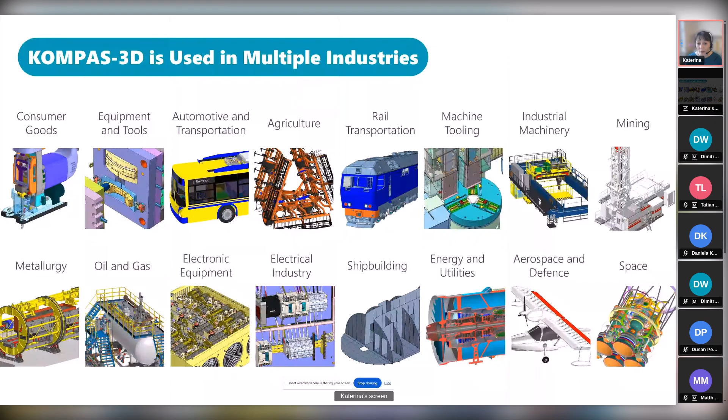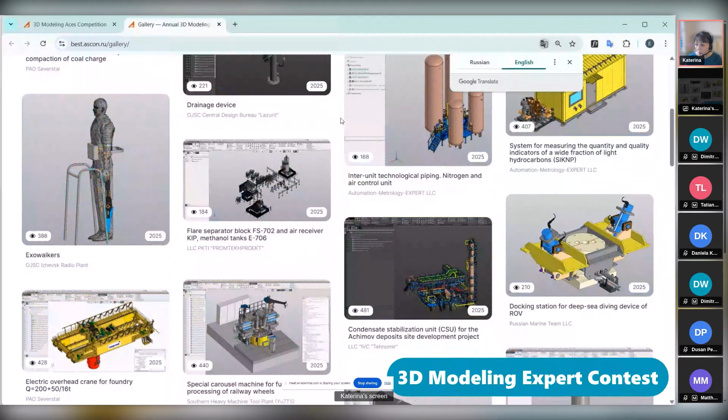Since 2003, we've been organizing the annual 3D modeling expert contest for professional users of KOMPAS-3D and its applications. The competition brings together both independent participants and corporate teams. You can explore the winning products. You can see them right now on your screen on the contest website. And this site is in Russian, but standard browser translation tools make it easy to view in your preferred language.

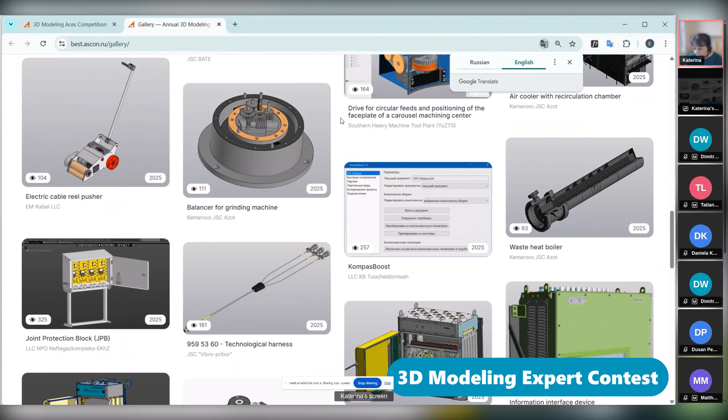So, what's inside KOMPAS-3D? Let's take a closer look. The current release is version 24.

KOMPAS-3D consists of base components and additional components. The base components are a system for part and assembly modeling in 3D space, a 2D editor for designing drawings and schemes, and a text editor. Additional components include various applications that allow you to solve specific tasks.

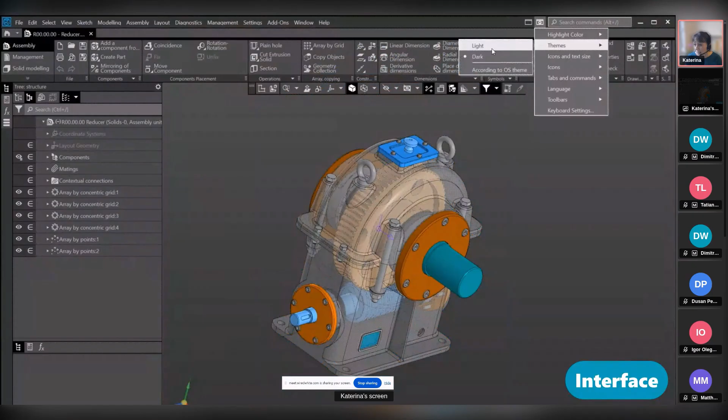What makes KOMPAS comfortable to use? First, its interface. You can customize it to suit your personal preferences. You can choose a dark or a light theme right now on the screen, and you can adjust and create your own toolbars and panels.

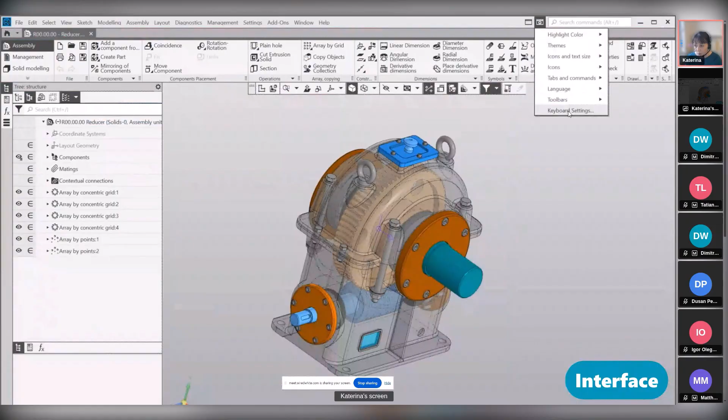KOMPAS-3D has a special mode for this. It's easy to add a new panel here and drag and drop all your favorite commands into it. And of course, you can assign shortcuts for actions you often repeat to help you optimize your work.

Performance. High speed and productivity when working with large assemblies were the core concept of one of the previous versions of KOMPAS-3D. We continue to develop this idea, and each new version is faster than the last one.

KOMPAS-3D provides working techniques and specialized tools for handling large assemblies, such as layout geometry or component load types, for example. Right now on your screen, you can see a real project designed by one of our clients. It's a large enough assembly, consisting of more than 60,000 components. The exact number you can see on the screen.

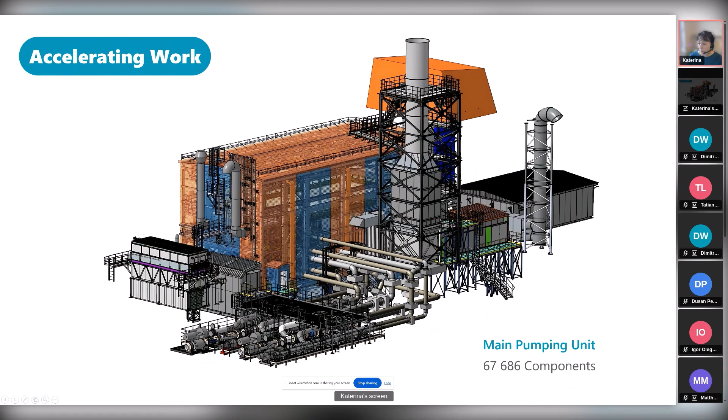This slide highlights impressive large assemblies created by our customers completely in KOMPAS-3D, and you can see how many components are in each of these projects.

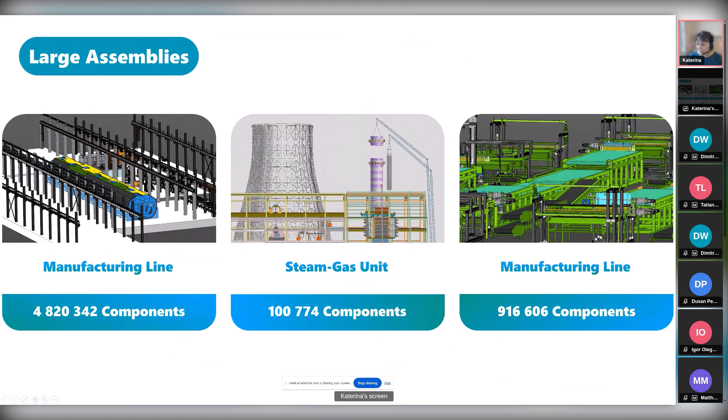And next, let's talk about functionality, our largest topic. KOMPAS-3D supports several types of 3D modeling: solid modeling, surface modeling, sheet metal modeling, and object modeling.

Now I'd like to offer you a quick question before we dive in. Do you use any of these modeling types in your daily work? Type it please in the chat: solid, surface, sheet metal, or maybe all of them. It will be interesting to know.

That's great. Solid, sheet metal, object. Okay, feel free, don't hesitate. It will help us to understand each other better.

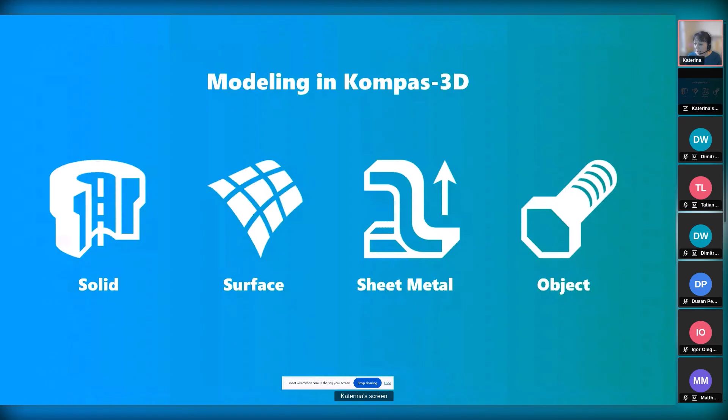And I'll return to my demonstration. Solid modeling. Solid modeling is the creation of a complete three-dimensional model that defines the full volume and physical properties of an object.

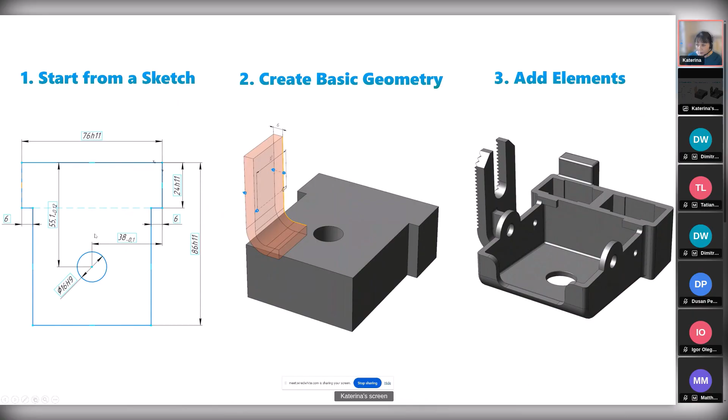Solid modeling usually begins with a sketch. Based on the sketch, we create basic 3D geometry. Then we add volume by extruding or revolving these sketches. And finally, we add elements such as fillets, holes, or ribs to complete the digital twin of the real product.

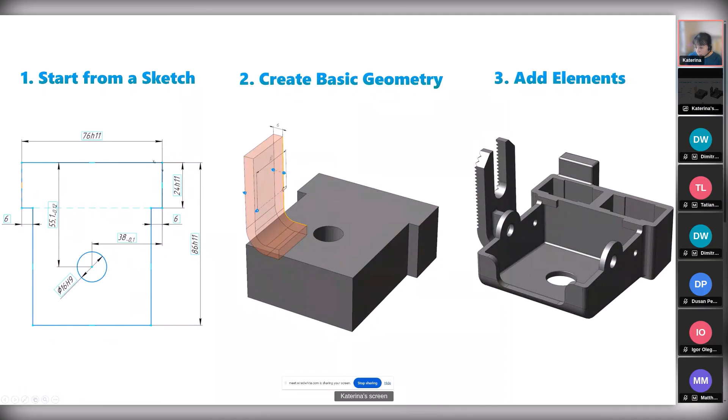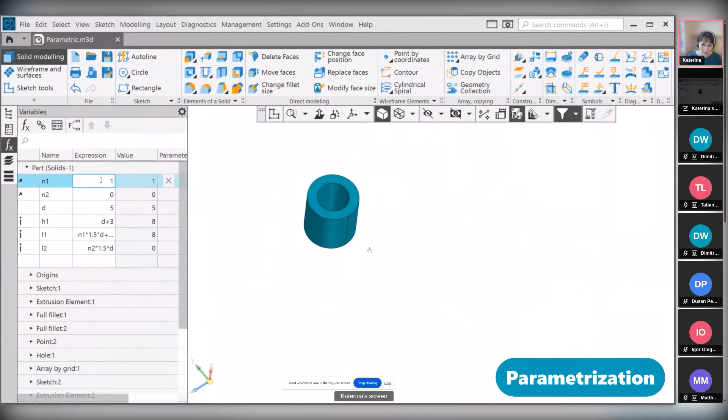Models can, of course, be parametric in KOMPAS-3D, as shown with this simple brick model. By changing a parameter value, we get new blocks. In this way, one model can contain many variants of a part or assembly. Here, I'm changing the number of holes for this brick, and at the moment it's being rebuilt, and we can get different parts as a result.

I'd also like to highlight some new features introduced in version 24. They may not be the most important additions, but they are certainly spectacular.

One feature allows you to assign a range of values for certain matings. This means you can limit the movements of an assembly part to realistically imitate the working positions of a mechanism. You can see it on this slide.

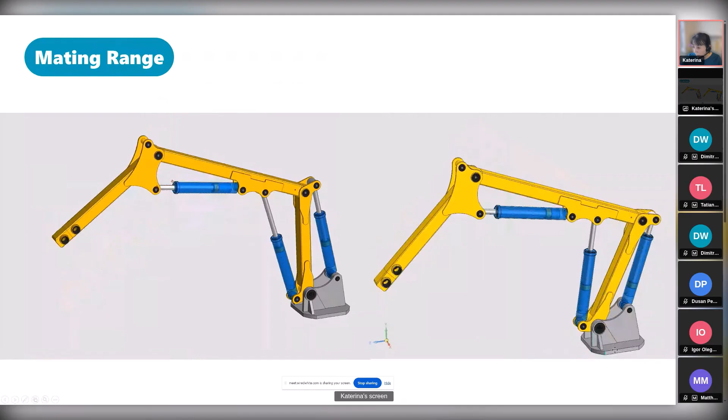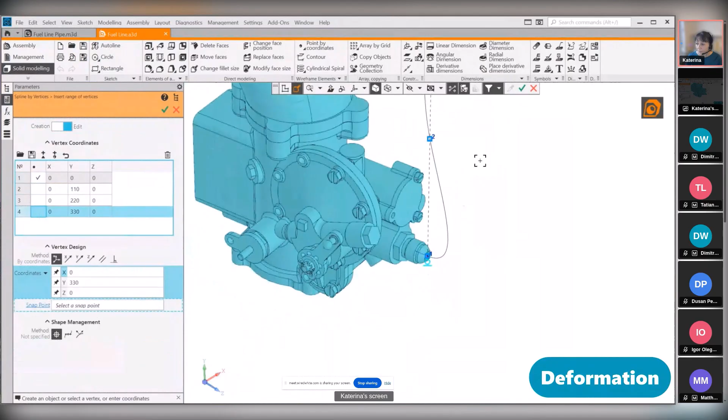Another feature lets you modify a component's shape according to its position in the assembly without changing the original source file. The deform command enables you to edit certain operations of a component and save the result directly inside the assembly, while the source file remains unchanged.

Here on the slide, in this video, I'm changing the shape of this pipe to connect it with the components of the fuel line. It's flexible.

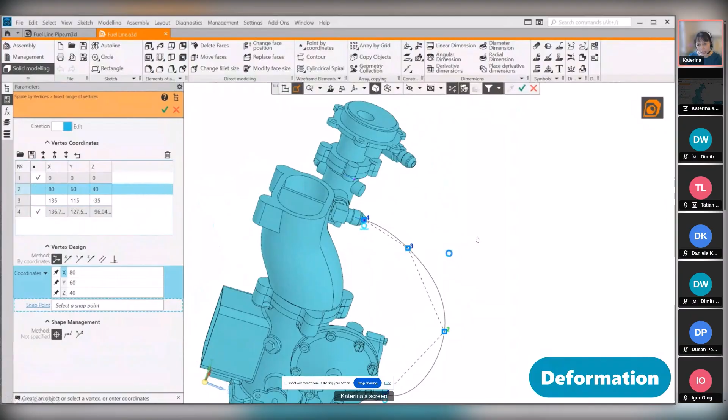The next modeling type is sheet metal modeling. It's the creation of models of thin-walled parts made from sheet material, with features such as bends, flanges, and the ability to generate a flat pattern for manufacturing.

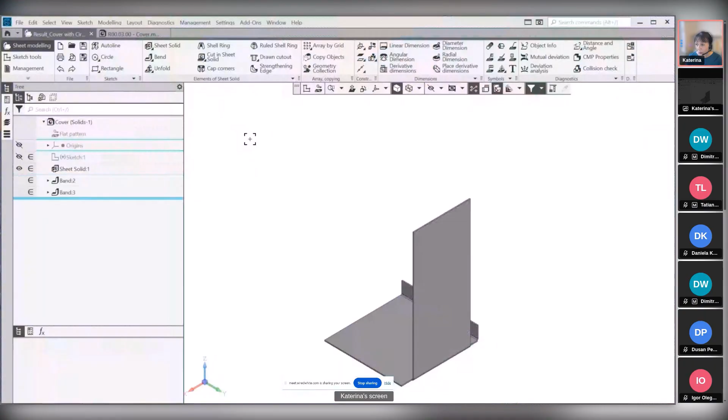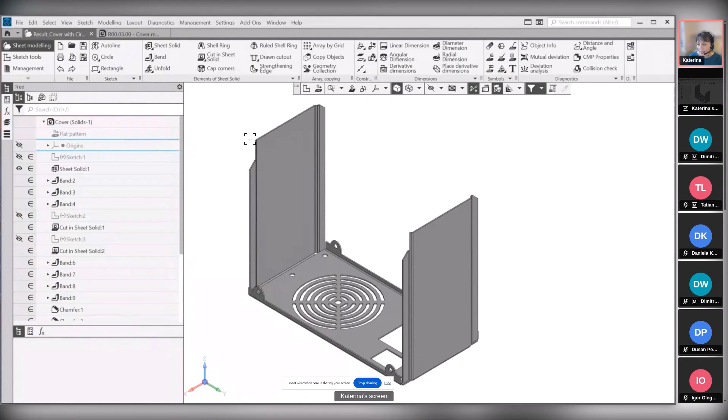Using sheet metal modeling in KOMPAS-3D, you can design a wide range of parts such as housings for appliances and electrical devices, shells, brackets, and much more—essentially anything that can be produced from sheet metal through bending and stamping. And of course, you can generate a flat pattern of the part to prepare it for production.

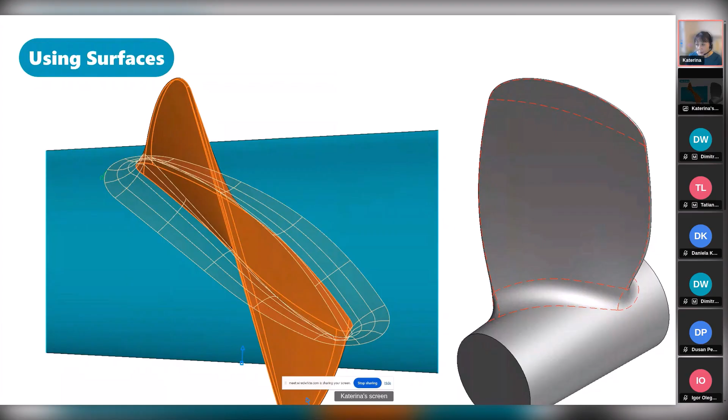Surface modeling is creation of a model using only the outer surfaces of an object without defining its internal volume. Surface modeling is most often used in aircraft manufacturing, shipbuilding, transport engineering, and in the design of consumer goods and technological equipment.

Typically, surface modeling begins with a kind of frame composed of special curves and points. Based on this frame, surfaces are created. To convert surfaces into a solid, you can add thickness and assign a material. If the surfaces form a closed volume, you simply knit them together to obtain a solid.

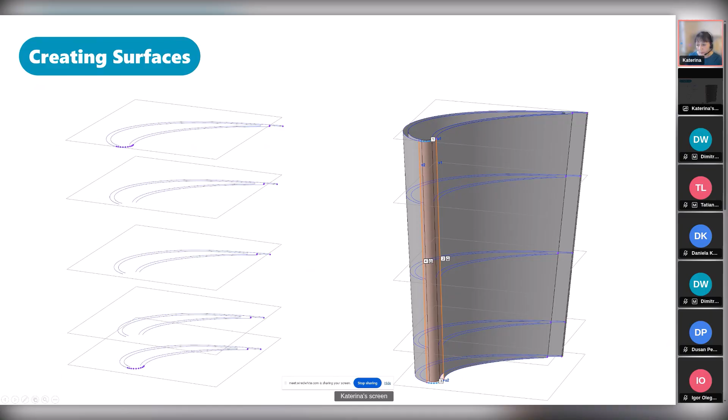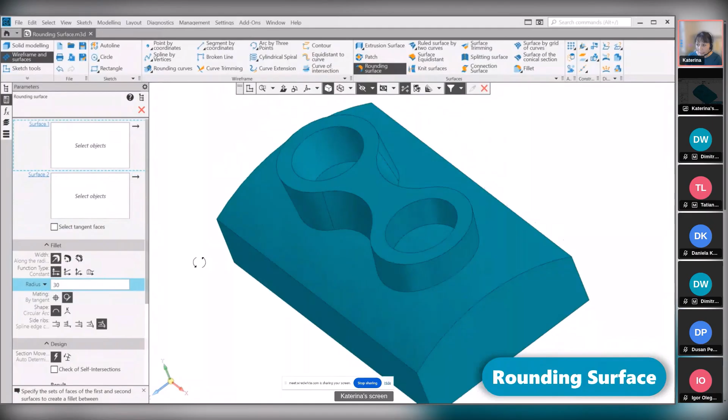One of the most popular commands among our users is rounding surface. It creates a transition surface between two selected surfaces that cannot share a common edge. This command is constantly being improved, offering various settings to control the shape of the rounding surface.

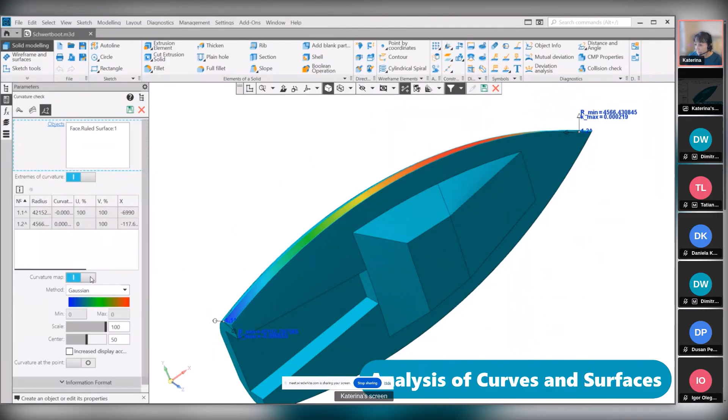When discussing surface modeling in aerodynamics or hydrodynamics, we should also mention the built-in tools for visual analysis of surfaces and curves. On this slide, you can see the results of curvature checking displayed as a curvature plot, and also as a color map. These tools allow you to find optimal geometry for a curve, identify areas of maximum curvature on a curve or a surface, and check continuity types at curve junction points.

Object modeling means using pre-made parts to create a product without relying on sketches. These objects can be modified quickly and easily, and they contain a lot of useful information designed to behave in specific ways.

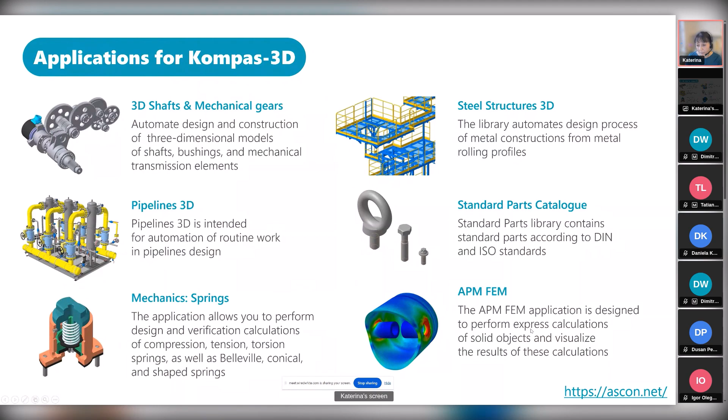And if you have a unique issue or a typical task that you'd like to optimize, and you know Python or C#, for example, you can create your own functionality using the API tools for KOMPAS-3D, and there's no need to purchase the API. It comes built into KOMPAS-3D.

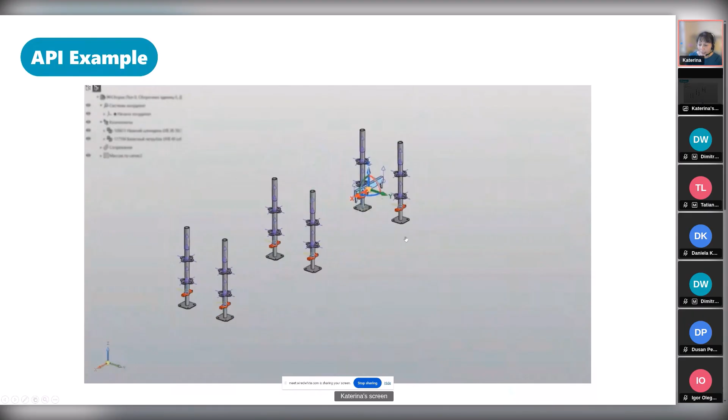Here you can see a demonstration of an application developed by one of our customers to streamline the design of scaffoldings. This app includes a library of standard elements and provides a kind of magnetization effect when positioning an element. Of course, it makes the design process faster and more intuitive.

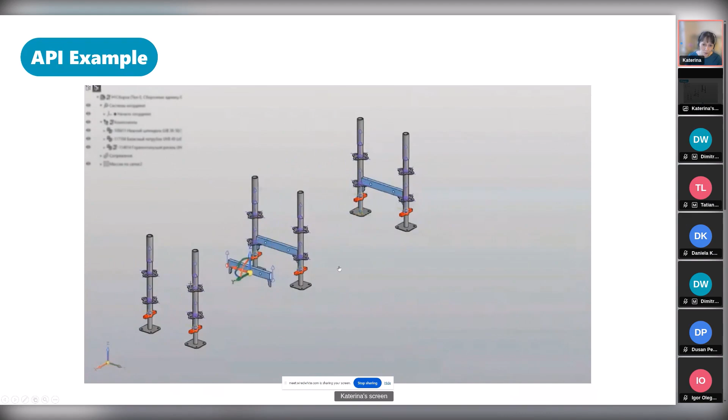Here's one more question for you. Have you ever needed to recreate a model from a physical object with no original drawing or file available? That's essentially what reverse engineering is about. Has this ever come up in your work? Let me know in the chat, please.

Many times. Unfortunately, I can't see at the same time both my presentation and the chat, so I've just stopped to read your answers. I can see that this theme is popular enough among our audience, so I can continue. I hope it will be interesting for you.

You know what it means, but let me give you a definition. Reverse engineering is the act of dismantling an object to see how it works. There are a variety of reasons to do this. For example, reverse engineering helps recreate critical parts when original documentation is missing or the manufacturer no longer exists.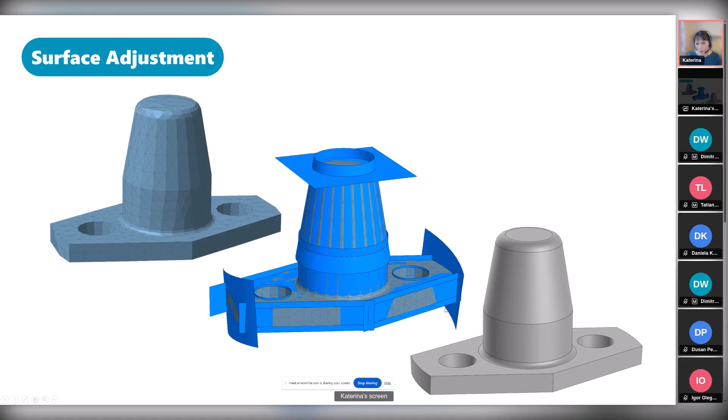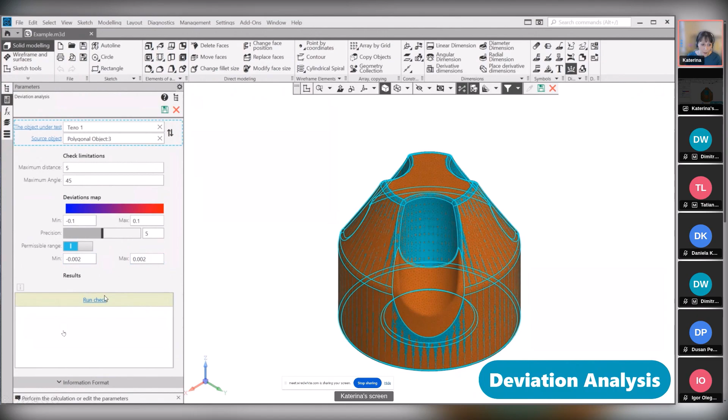We are constantly improving the deviation analysis command, which allows a comparison between two objects, for example a part and its polygonal model. You can adjust precision and deviation ranges, and the calculation will produce a color map as a result.

Drawing and reports: KOMPAS-3D includes a functional 2D editor. It allows you to generate views from the model or create a drawing from scratch without using a 3D model at all. You can create either a parametric drawing or a draft without parametric constraints.

When a drawing contains associative views generated from the 3D assembly model, you can also generate a bill of materials and place it directly into your drawing.

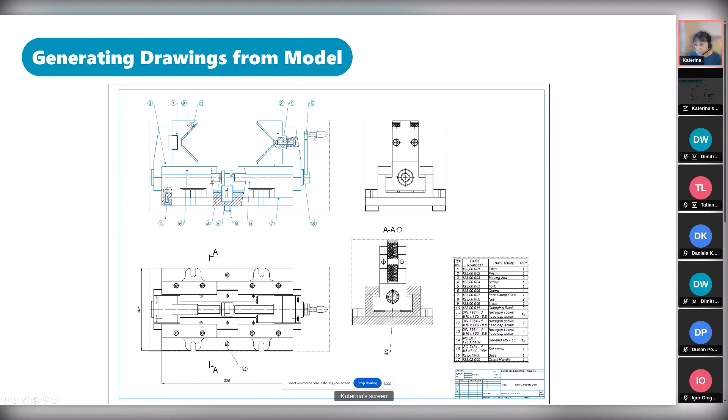And if you prefer to abandon drawings altogether, you can create a so-called model-based definition model by adding product and manufacturing information directly to the 3D model.

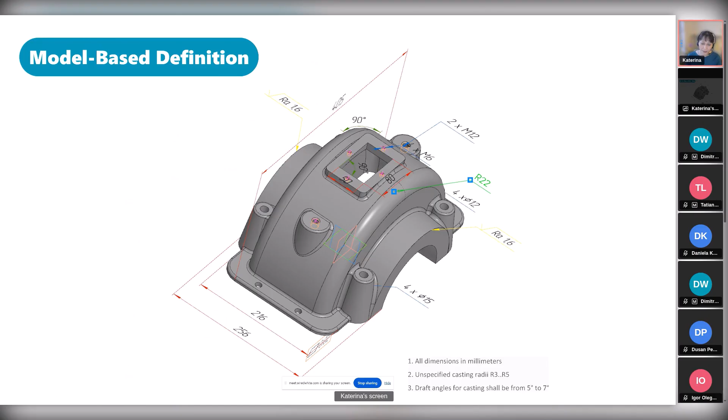Usually, software developers use their own proprietary formats to save 3D models and design data. These formats are closed, and other CAD systems have very limited ability to read them. At present, there are no tools on the market that allow complete transfer of all data from one CAD system to another. In most cases, only geometrical data can be transferred.

KOMPAS-3D allows you to work with such formats through special converters or by using universal data formats such as STEP or IGES. Working with imported geometry is one of our priority themes. We continue to develop data exchange tools and tools for direct editing of geometry without design history.

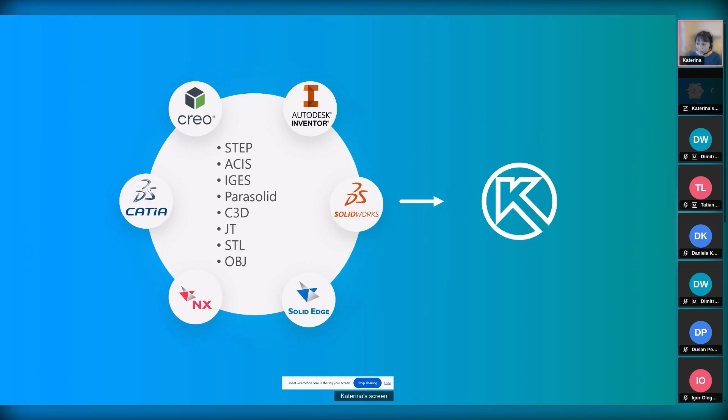KOMPAS-3D provides several scenarios for working with imported models. Let's take a look at some of them. One option is to insert a model in a proprietary format directly into an assembly.

Right here on your screen, you can see that I've just inserted the bracket model. It was created in SolidWorks, and now it has been added into KOMPAS in its proprietary format. KOMPAS creates a kind of geometry representation of the model that remains linked to the source file.

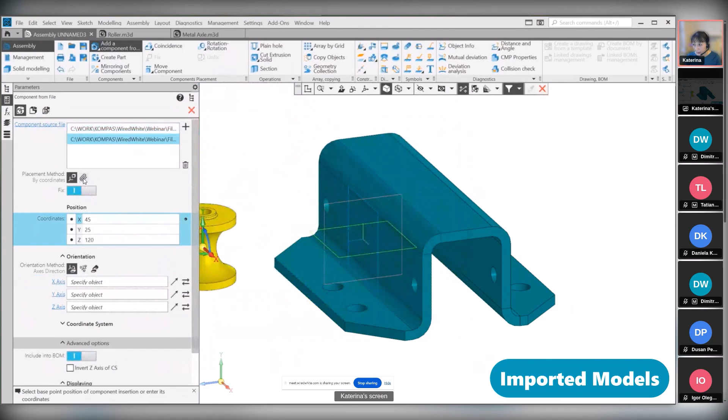It's not possible to modify it in KOMPAS, but if the source file is changed in the CAD system where this model was created, the changes will be reflected in KOMPAS-3D. The model elements can be used as a base for placing other components or creating new ones.

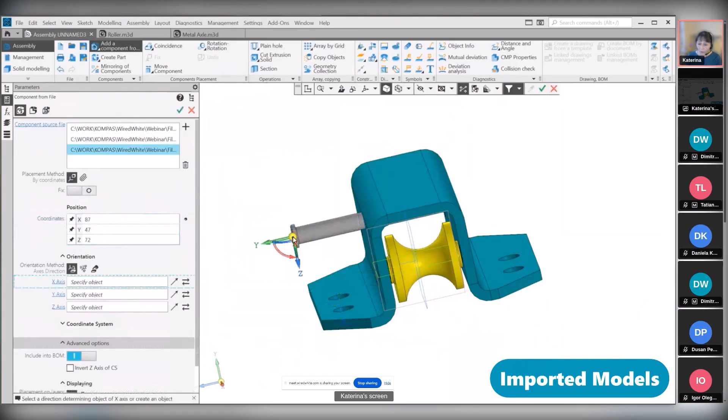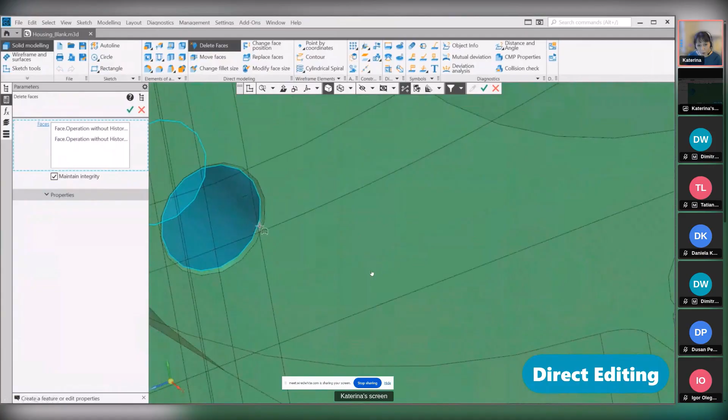Another way to work with imported models is to modify them using direct editing tools. These tools allow you to refine the model without design history. This is the reducer housing model, and it has no design history.

Right now I've deleted the hole by using special direct modeling commands, and I'm going to move this inspection window hole upwards.

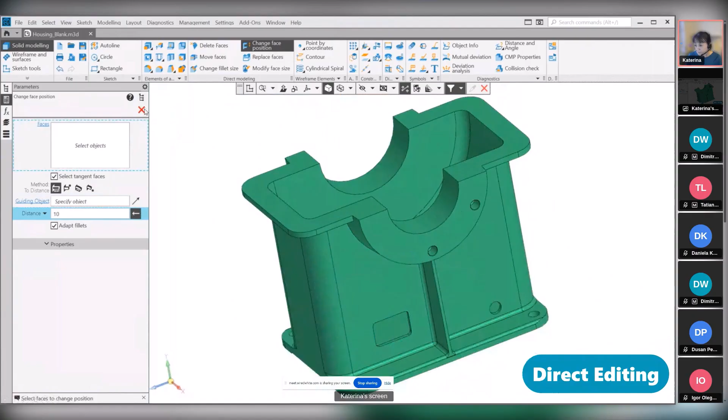It works this way. A further scenario involves using a special application called 3D model recognition. This application enables you to recreate the design history of an imported model. The recreated history will not be identical to the original, since KOMPAS generates it according to its own logic. You can see how this process works on the current slide.

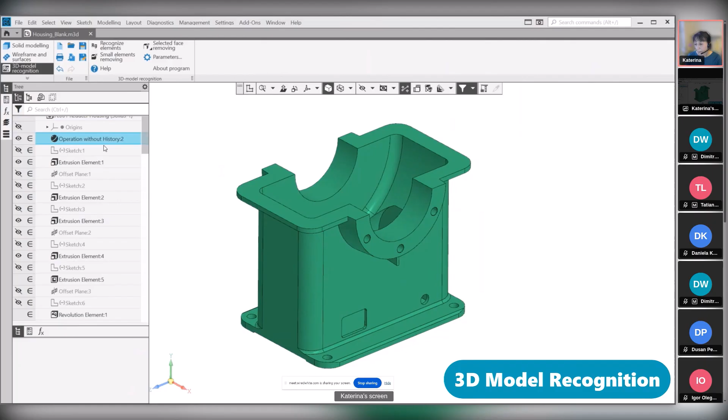You can take them for free. And of course, you'll find several KOMPAS-3D courses on the WiredWhite platform, and you can take them for free too. It's also possible to validate your KOMPAS-3D proficiency level and receive an official certificate. More details are available on the certification page.

This service is free. You only need to register on the site.

Another important direction of development for KOMPAS-3D is the version for Linux. Our team is working on it, and we expect the result in 2027.

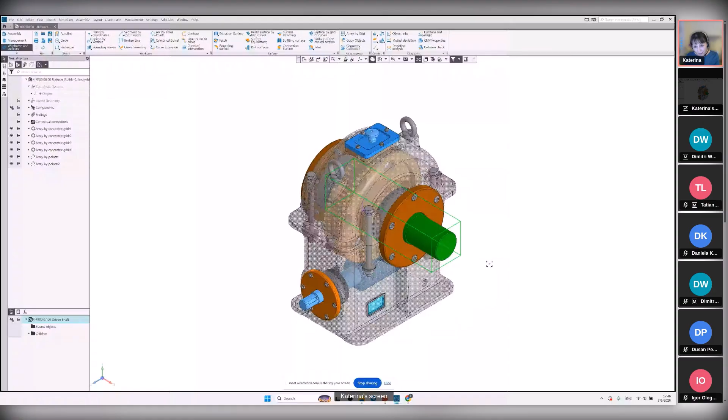Another feature that's maybe not very important, but very comfortable for me, is the possibility to use Ctrl+C, Ctrl+V. I can select any component in my assembly, for example, press Ctrl+C, and insert it into another assembly. It's very intuitive.

Of course, our team constantly improves working speed, and I'd like to show you these very large assemblies created by our users in KOMPAS-3D, but it's impossible to show in this format.

The rounding surface command, which I mentioned earlier, remains one of the most popular features. One of our advantages is the diagnostic tools built into KOMPAS-3D — you don't need to purchase them separately. One new command that is very useful, and based on client opinion, lets you check and find small size faces or self-intersections that are difficult to spot visually.

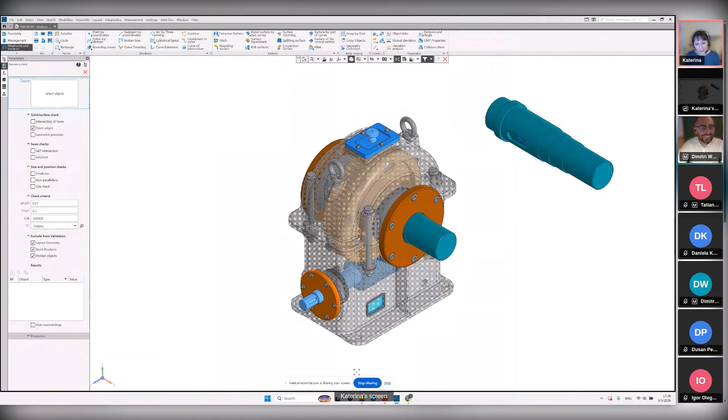Very nice, I like this search function a lot. Yeah, one of the most useful ones — it's fine, but it's really important, the devil is in the details. And coming back to Dusan's question, this will make the transition easier from SolidWorks to Kompas, since you can now search for functions in the latest version. We offer many courses and we're ready to help answer your questions.

So we have a next question regarding practical examples of when to use parametric modeling versus direct modeling — maybe some examples from your experience where, in a particular application or case, you'd recommend a parametric model, and in another case, you'd recommend direct modeling. I understand what you mean — I'll try.

If you're designing a product from scratch — any part of a mechanism or a component of an assembly — one example we use in our courses on your platform is about a rotor lamination sheet, when you need to test the working of a part of a mechanism with different parameters. Parametric modeling is the right choice here; it gives you full control over the design, and any change you make propagates through the model automatically. You can manage this model completely, and in the majority of cases, parametric modeling is the right choice.